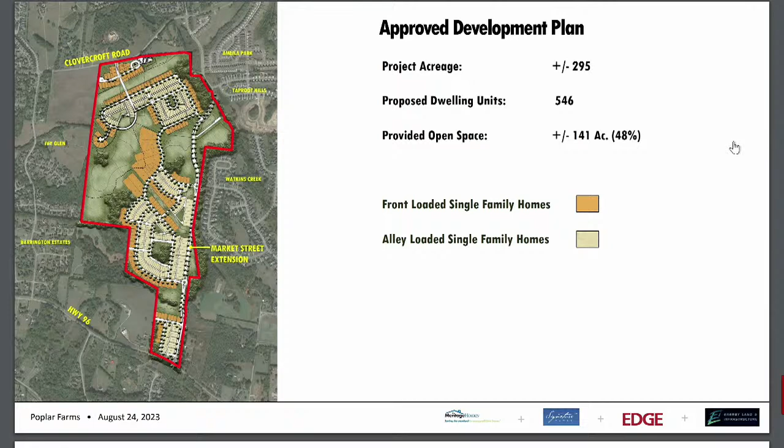So as we get into this, Chelsea and yourselves did cover kind of why we were making this request a little bit, but the key points for us when we began to look at this and talk with the builder were really trying to provide a lot more variety in the street elevations of these homes, and what we can provide to homeowners with options for 3-car garages on some of these homes, change our massing, as well as adjust some of our spacing between the homes with that.

One of the things we are also proposing with this is increasing the setback for all front-loaded garages from a minimum of 20 feet from the street to 40 feet, to help offset some of that appearance as you have coming down the street of people parking in front of those garages in motor courts. Obviously we have a lot of families in these communities in Franklin, with toys, bikes, those sorts of things, which would all be, as you drive down the street, an additional 20 feet back, or in some cases screened by a 3rd-car garage, as we'll see as we go through this.

Like we said, this is only the 65-foot front-load lots that are affected. All the other homes are alley loaded and would remain as currently approved.

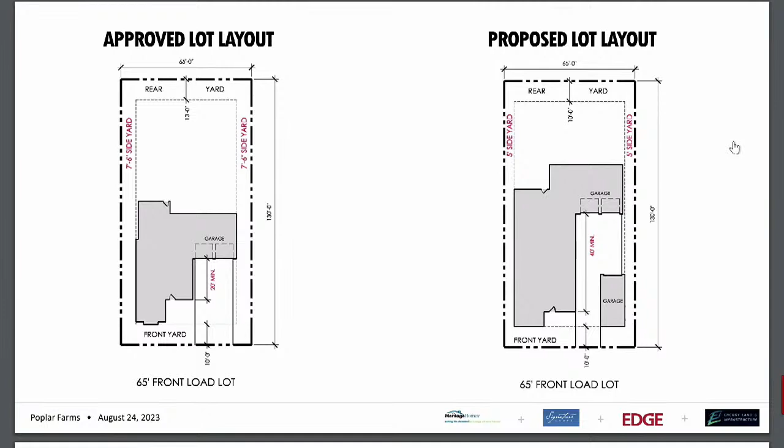So this just shows in a plan view section what the approved lot layout would be, with a standard 7.5-foot side setback, 2-car garage set at least 20 feet back from the front facade of the residence where the front door is. And then what we're proposing is increasing that to 40 feet, which would allow us to do an option of a porte-cochere, shown here with the 3rd-car garage set to the side, which would also reduce the view into the front-loaded garage motor courts. In some cases the 3rd-car garage can be attached to the residence, again minimizing that view as you come down the street of those front-loaded garages.

So a few examples, as you've probably seen in your packets, of product that can be delivered on the currently approved lots, for examples of massing and scale. On all these, you'll see fairly standard, not really unique massing. We have our standard box, 2-car garage setback, 2-car driveway going up in each of these cases. Though you can change the architecture, the general massing on the lot spacing is going to be fairly similar as you drive down the street.

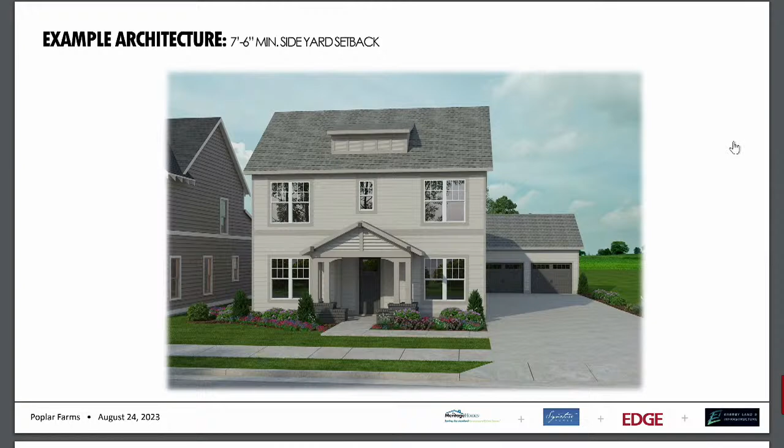When we looked at what we could provide by reducing the setbacks by those additional 2.5 feet, it really opened up the opportunity to look at options like we see here, which would allow for the porte-cochere, the 3rd-car option, reducing that view as you see coming down the street, and reducing the amount of concrete you have on that driveway to a single lane versus 2-car width coming in.

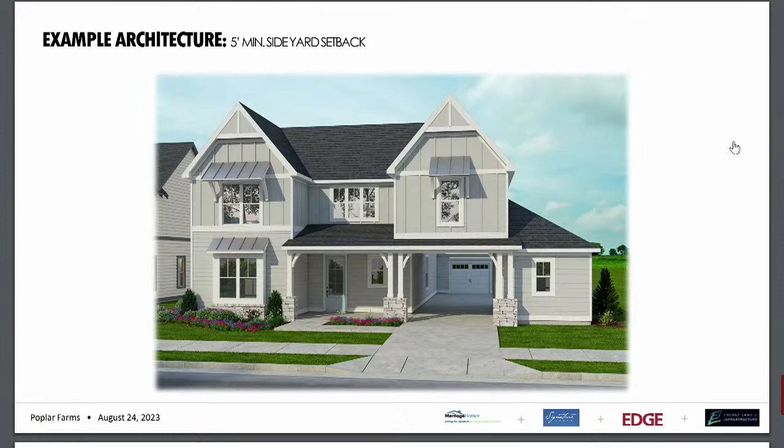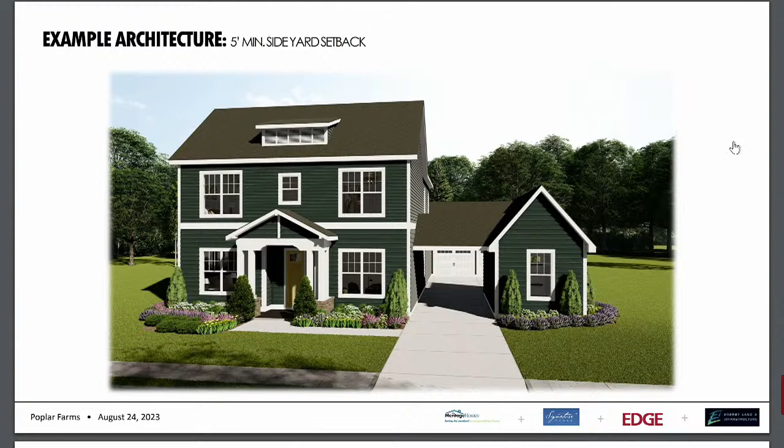It's just another example of the porte-cochere with a varied elevation. This example shows that even with the 3rd-car garage added, you won't always have that additional massing on the 2nd floor going all the way across—you just have the breezeway connection there. This lends itself to a wider appearance and separation between the two lots, varying that massing as you go down the street a lot more than we could with just the standard setbacks.

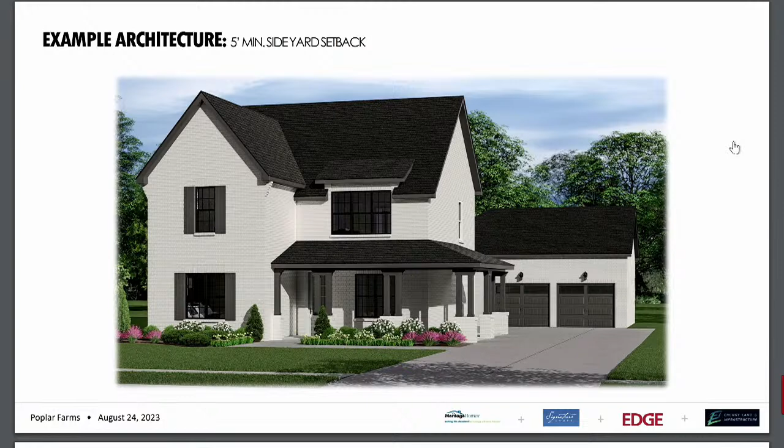The other thing we are able to integrate is an option if someone did not want a 3rd-car garage. It allows us the space to recess that garage back, push the driveway more to the side, and allow for the ability to have a wraparound porch on these homes, which again just provides a little bit more variety and character as you drive up and down the street.

Can we pull up the additional? Based on our neighborhood meeting and some of the feedback we received from neighbors in the adjacent communities, we pulled together two other graphics. This one shows what it could look like with the 5-foot setbacks, a proposed streetscape, and this incorporates all of the options that could be built.

So you have your porte-cochere with a 3rd-car garage. You have someone that maybe just still only needs a 2-car garage, but would be recessed back from the street, in some cases upwards of 50 to 60 feet. And then the 3rd-car garage attached with the porch. We think when you look at this across the entire street, it provides a lot more character, a lot more variation and uniqueness, which would just be a little bit better product, a better community as a whole.

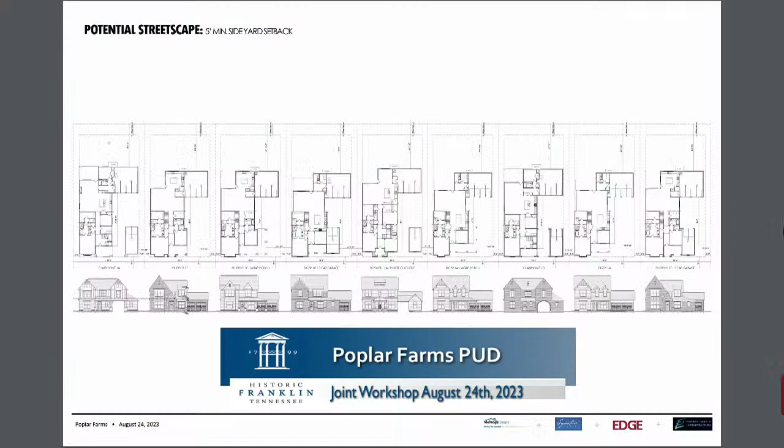Without the extra garage to the front, that's correct. In that scenario where we would have the extra garage, detached here, you would have the potential to just have 10 feet of separation at the street frontage.

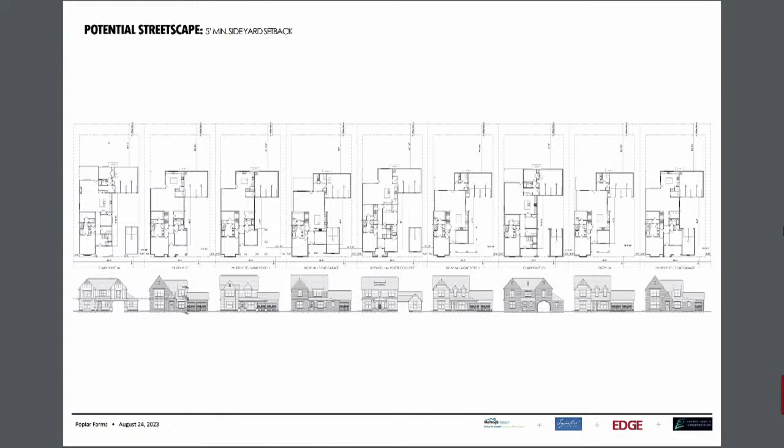If you need 5 feet, is there some regulation keeping you from going to a 70 foot lot width instead of 65? Not a regulation. We've studied that scenario both early on and now, and it turns out with layouts you lose too much density to make it viable.

If that's fair to say from the development side. I don't know that that's necessarily our fault there. No, I believe everyone is comfortable with moving forward the way it's approved. It's just as we started to have this conversation when the final builder group got finalized and looking at options, that's how this revisit with staff and commissioners started.

Other question, comment. I just want to clarify, this started off with a requirement of 10 feet, and staff compromised down to 7.5 feet. Is that correct? That's correct. Okay, I just wanted to be clear.

I would say in general I wouldn't be in favor of reducing those side setbacks for a couple of reasons. One, staff illustrated the negative massing impact on the street. But also, when you add that third car and push everything back, it's eliminating that backyard, which is a premium feature you can find for a house in Franklin. So I don't see some of the positives as positives - I see them kind of negatively affecting that lot layout.

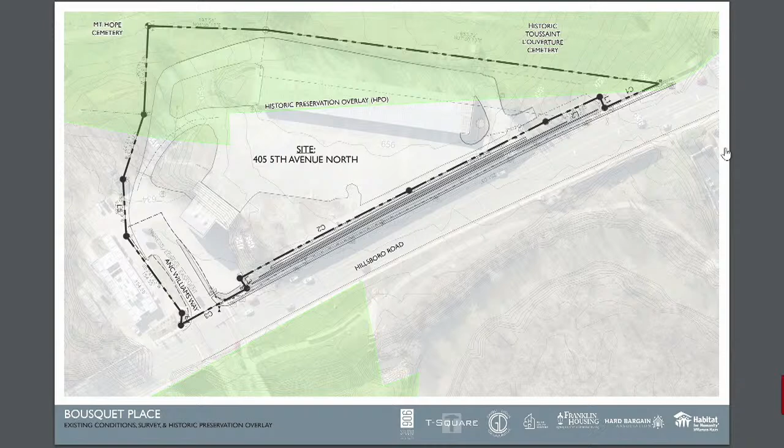A portion of this property has a historic preservation overlay on it, due to its proximity to the cemetery that's there now. The Toussaint Cemetery is on the right, and the Mount Hope Cemetery is on the left — so we've got two different cemeteries located here.

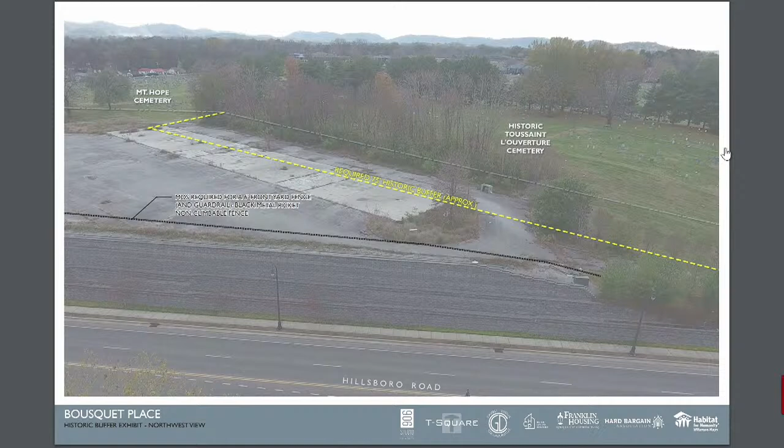Along Hillsboro Road, we have an approximately 35 to 40 foot retaining wall. This gives us some pause for safety for any residents living on top of this area, and we'll talk about that safety consideration in a moment. I wanted to outline the location of the 75-foot historic buffer applied to the property line adjacent to the cemetery. You'll notice this area has concrete and asphalt in it — all of that will be removed and replanted per the zoning ordinance requirements for historic buffers.

The master plan includes a total of 33 homes, with a mixture of home types on this property. The policy for the property is mixed residential. The current zoning is civic institutional, so we need to ask for it to be rezoned to planned development district — that's what we're in the process of doing now.

There are two different building types. The first is townhome, shown here in red — they face front onto Hillsboro Road at the top of the retaining wall. There's also one other 5-unit townhome building in the top left corner, fronting onto the new public right-of-way.

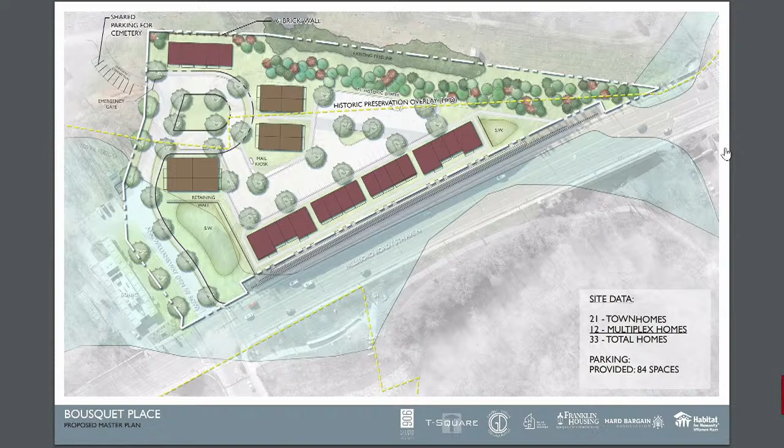The other three buildings are multiplex buildings. Now, the home lives as a 2-story townhome, but we have two that are back-to-back, so you have a front facing toward the public right-of-way and a front facing into the interior of the property. Each multiplex building has doors accessed from the ground floor, almost like having two duplexes back-to-back. Every unit you see here is 3-bedroom, but we have a combination of 1-story and 2-story buildings, recognizing that not everyone who needs affordable housing can have a 2-story living condition — some need 1-story, and we're trying to accommodate that on this property.

The safety fire access that Amy was talking about is in response to the fact that the intersection at Sonic on Hillsboro Road is under the 100-year floodplain when the 100-year flood exists. This isn't an emergency connection the fire department needs for everyday emergencies — this is for when the Harpeth River is flooded and you cannot access this property as a result.

What we're proposing is to add an asphalt driveway that connects to the drive within the cemetery and then exits out onto Mount Hope Road. We had a fire tower truck drive this route, pull into the cemetery, go through the columns that are there now, and exit back out. We've been working closely with the fire department to make sure this can be accommodated, and if not, we can look for alternative routes, but we believe this satisfies the city. We've been in conversations over the past six or seven months with the cemetery, so this is not a surprise to them — they're aware of it. We just have to get documentation filled out, finished, and submitted to the city of Franklin.

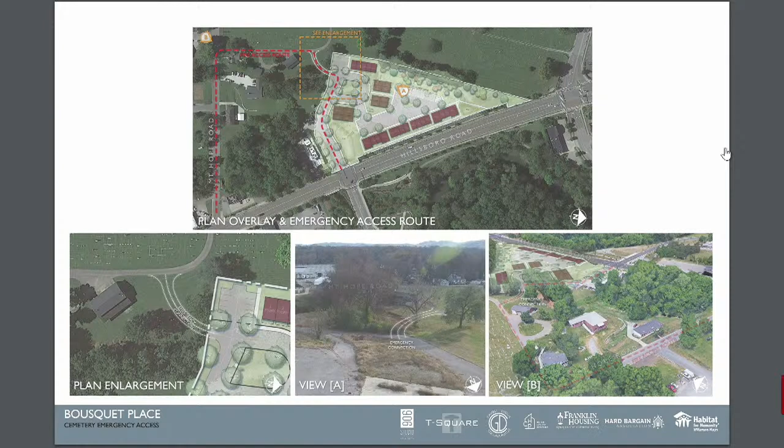There are 3 modifications that we're requesting. One is for a reduction in parking.

We had a conversation with the Historic Zoning Commission about reducing the 75-foot historic buffer, which, because of its relationship to the cemetery, they felt was pretty important. With a reduction in the buffer, we could have provided all of the parking, but in respecting that buffer and its full width, and restoring that asphalt and concrete area back to landscape, we do need a reduction in parking. The ownership and developers are confident that we are providing sufficient parking for these townhomes in this plan and will not have a shortfall. We are proposing a total of 2.48 parking spaces per 3-bedroom townhome as part of this development plan.

The second request we have in modification of standards is for a 6-foot metal picket, non-climbable fence in the front yard along Hillsboro Road. Remember, those townhomes are facing Hillsboro, so that's their front, and we want that front architecture along Hillsboro. But we are concerned about safety considerations along Hillsboro Road with that retaining wall. The zoning ordinance requires a maximum 3-foot fence in a front yard, and we're asking for 6 feet just to prevent children from climbing over the 3-foot fence and getting into a dangerous situation. We do want that to be a black metal picket fence, landscaped behind it so that it disappears.

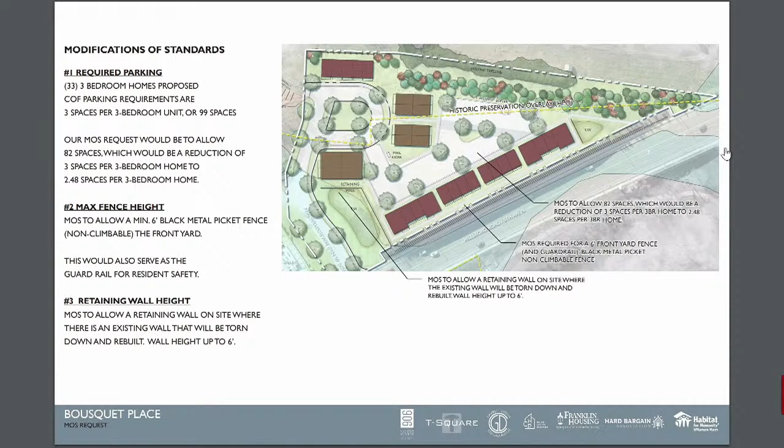This shows the black metal fence. Again, we're still working with staff on its final location. Mike Hathaway with 906 has been working through various architectural elevations with us to identify the right residential character. In Envision Franklin, it requires that the architecture blend with the existing neighborhoods adjacent to us. We're not adjacent to an existing neighborhood, so we're pulling from the history of architecture and the residential character of what we would see in Hard Bargain or downtown Franklin, pulling a lot from that character.

Here represented in Mike's drawing, down the lower level, is a multiplex building. This building has 4 residential homes in it — 2 that are facing the interior of the site, and 2 that are facing back toward the Sonic neighborhood. These are 2 side elevations.

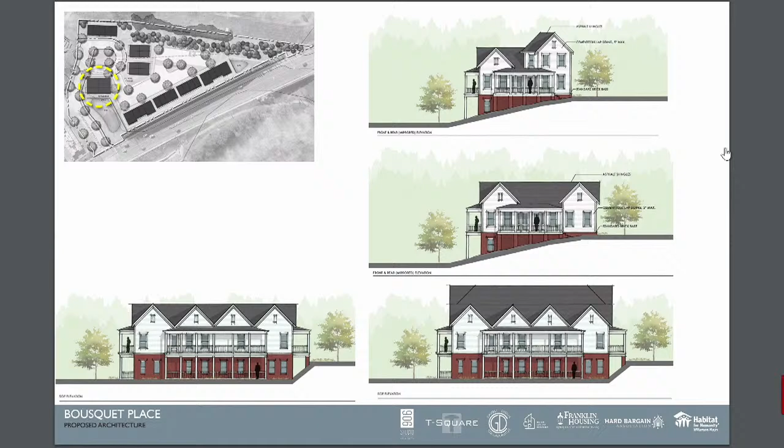We're going to be revising those side elevations prior to the September 6th resubmittal. We had some input from the board and mayor and alderman at the last work session at BOMA, so we're going to go back and look at that elevation and provide some alternatives on what that looks like.

On the top image here, this is one of our multiplex buildings. This is the front facade facing back toward our open space park that's in the middle of the drives, it circles back around. The bottom image is the 5-unit townhome building that would back up to the cemetery.

Historic Zoning Commission asked that we provide more significant landscape planting behind this building adjacent to Mount Hope. Mount Hope Cemetery does not have the 75-foot buffer like the Toussaint Cemetery does, so there's a little nook there that we can put this townhome in. Historic asked us to provide more landscape in that location, which we're going to be able to accomplish, no problem.

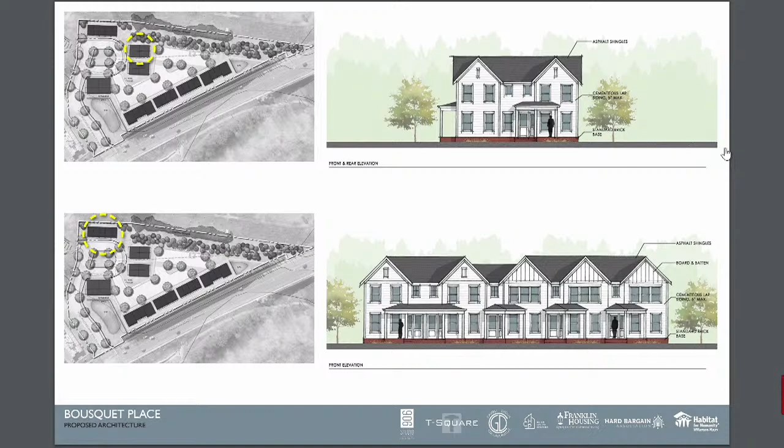With that, Mike Hathaway, Derwin, and I are happy to answer any questions you may have. I'll leave it on the master plan if you have any questions referenced to that as well. Okay, questions?

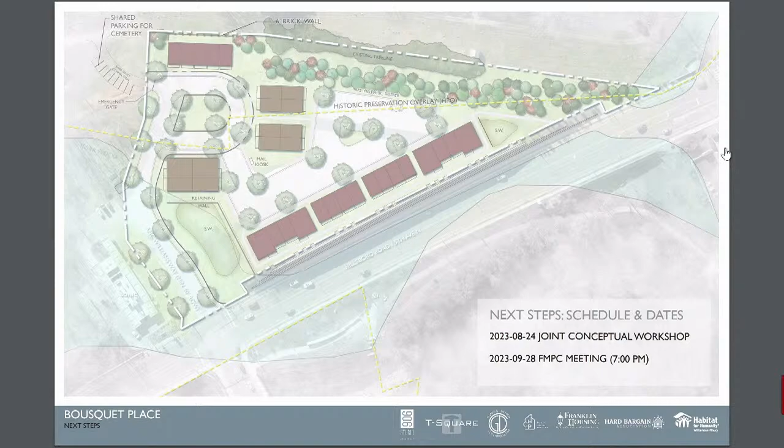I've got a couple. First of all, the architectural renderings show some really nice looking structures. I'd expect that out of Mr. Hathaway. But are all the units there considered affordable and workforce housing?

It's going to be a mixture. Part of the RFP response to the city of Franklin, when they requested for teams to come forward, was that there needed to be a mixture of workforce and affordable housing. Okay, so it's a combination.

Okay, and then I know it is the solid waste transfer station, so that whole structure comes down. And you replace what part of that structure is retaining wall? Correct, so you replace that portion of the retaining wall with similar height to what's there now. That's correct.

And then I noticed that in some of the multiplex units, when you look at the master plan, especially the two in the middle, it's hard to tell exactly how parking works. Is there parking in close proximity to each of those different multiplex buildings? Is it expected that there's some?

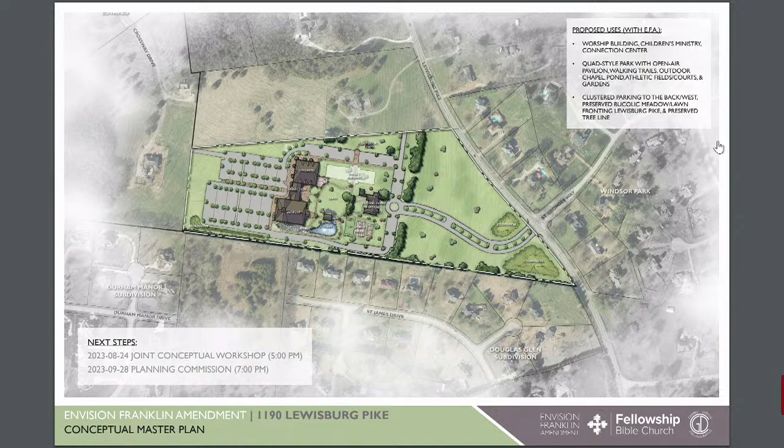We've been very intentional about not putting parking directly behind existing single-family homes. We want to make sure that we listen to those neighbors, that we buffer those neighbors, that they don't feel like a church is moving into their backyard, and we see that as significant and important.

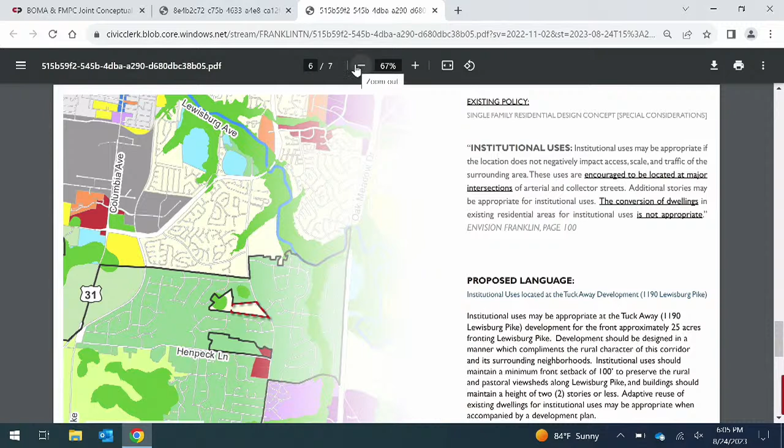The special consideration that we are requesting to be approved as a part of Envision Franklin says institutional uses may be appropriate at the Tuck Away 1190 Lewisburg Pike development for the front approximately 25 acres fronting Lewisburg Pike. Development should be designed in a manner that complements rural character of this corridor and the surrounding neighborhoods. Institutional uses should maintain a minimum front setback of 100 feet to preserve the rural and pastoral view sheds along Lewisburg Pike. And the building should maintain a height of 2 stories or less.

Adaptive reuse of existing dwellings for institutional uses may be appropriate when accompanied by a development plan. And I think that's key to this, that a special consideration would lock in the fact that this could only happen through a development plan where the planning commission and the board, mayor, and aldermen get to review the size of the buildings, the traffic study, the height of the buildings, the rural character of those buildings. Does it fit the neighborhood context? I think are all very significant and very important.

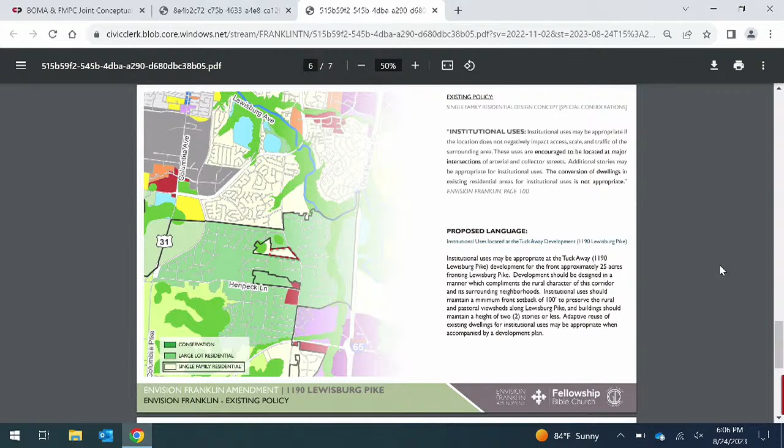I think one of the most important aspects that I consider as a part of being a part of this master plan process is that the pastoral team continues to reiterate to us that the worship experience is the entire property and it starts at the entrance, and that this threshold as you enter into the property, this boulevard that brings you onto the campus, is about a decompression zone. It's about an experience of leaving Lewisburg Pike, entering into this campus where you have a very pedestrian-oriented layout of buildings. But that boulevard also provides us with storage for vehicles as they're leaving and exiting on Sunday morning.

Right now, Fellowship has 3 services. Each service has about 200 members per service spread out over the Sunday morning. So it doesn't happen all at once.

It's not the entire congregation all at once, and it is a small congregation. So in terms of scale, it's very complementary to a lot of the other smaller churches that exist right now on Lewisburg Pike. With that, we're happy to answer any other questions you may have.

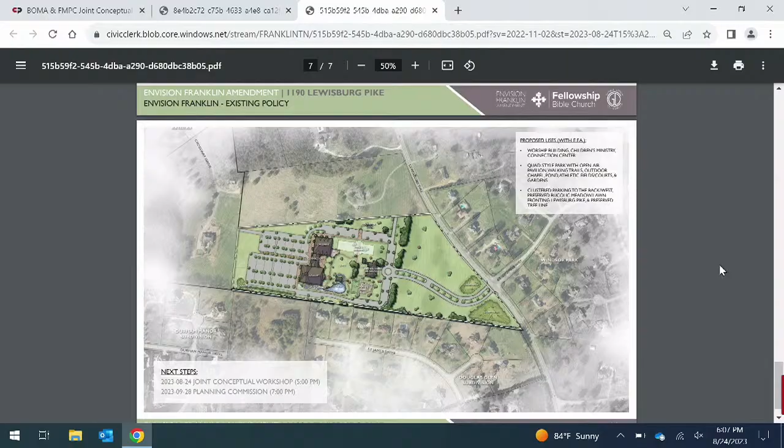Okay, thank you, Greg. Alderman Brown? So in this amendment, are you removing the back area of the plan, of the development, around Crossway? Are you removing that from this?

We will have to address that, likely in a new PUD or in a straight rezoning to R1 or R2, something to that effect. It can't be a part of the existing situation, but right now we're just asking for this Envision Franklin consideration. So if this is successful and we move to the next step, we're going to be having conversations with you about what happens to the remaining property. This is only about the front 25 acres.

Yeah, and that extends how far back? Back to the back of the parking? Is that the 25 feet? 25 acres, I mean 25 acres.

Chairman, it's about right here. So this is an existing residence, and there's an existing residence up here. Both of those would stay. The church would purchase to about this location right here.

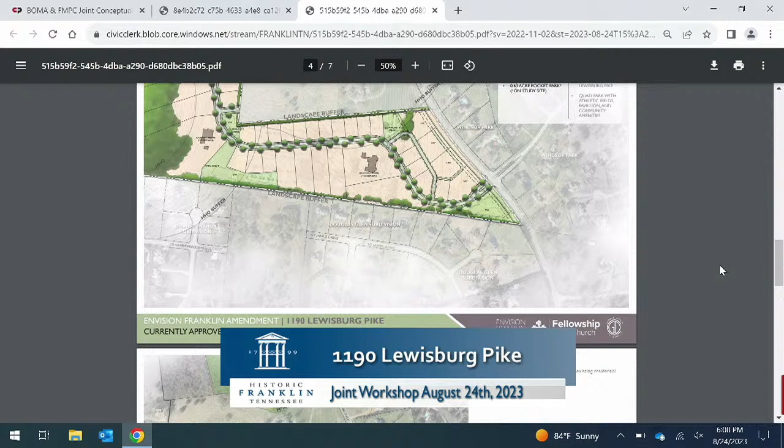Alderman Baggett, go ahead. The text says 100-foot setback on Lewisburg, but the home is now presently 300 feet. The home is approximately 350 feet.

From Lewisburg, so I really have no problem with this, I think actually it's a... Let me add to that just one second. On Lewisburg Pike, from Goose Creek Bypass south, there's a 100-foot scenic corridor buffer. That 100-foot is really derived from that distance, but the church wants the full distance to have that open space along Lewisburg. So for me, I think it would be a good thing if we could adjust that possibly.

If we're going to go that route, because what I don't want is future expansion of the church towards Lewisburg that increases the size and the traffic concerns. And so I don't know what tools are in the tool belt to ensure that wouldn't happen down the line, whether that's through some sort of easement or conservation. I don't know that this would qualify for conservation. I don't know what tools are in the tool belt, but making sure that it stays 300 feet back, in perpetuity,

helps me a little bit in knowing that we're not going to have another building in 10 years that kind of creeps up, and then all of a sudden you have capacity for 2,000 people, and we've got a real problem. I think the limitation of what can be built behind the 350 really makes it palatable for sure. And I think, quite frankly, not a lot of places you can build churches in Franklin. Well, there are, but it's hard. And it really is something we need to be thinking about.

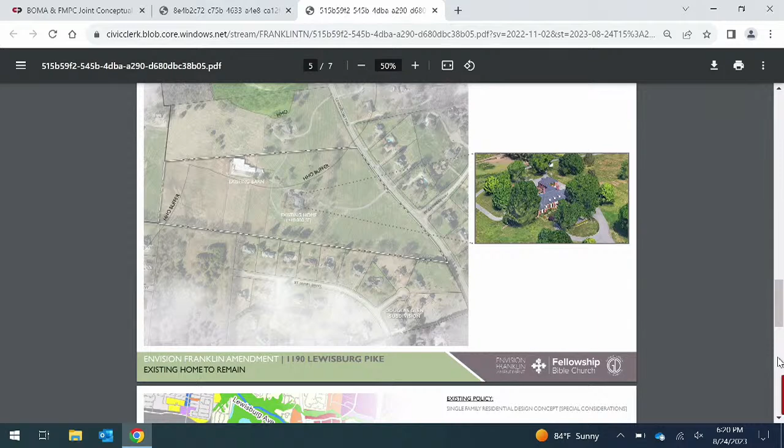The other thing I noticed is the back portion of this parcel—are both of those existing residences in the back accessed through Crossway Drive? They are today, yes. And those are the sellers of the land as well. So they wouldn't be impacted either way—if the church buys up to that point, their means of ingress and egress is already defined through Crossway Drive.

It seems like we had similar conversations when the Church of Christ went in on Lewisburg, and the concerns raised then had to do with an elementary school right across the street, and how much access there'd be from church on Sunday to school on Monday, given it's still just a two-lane highway. I think there will always be challenges with traffic on and off Lewisburg Pike until it has an expanded number of lanes.

We really hope to take the peak hour traffic trips during the week and the school impact traffic off the table. Thank y'all for your consideration tonight. Really appreciate it.